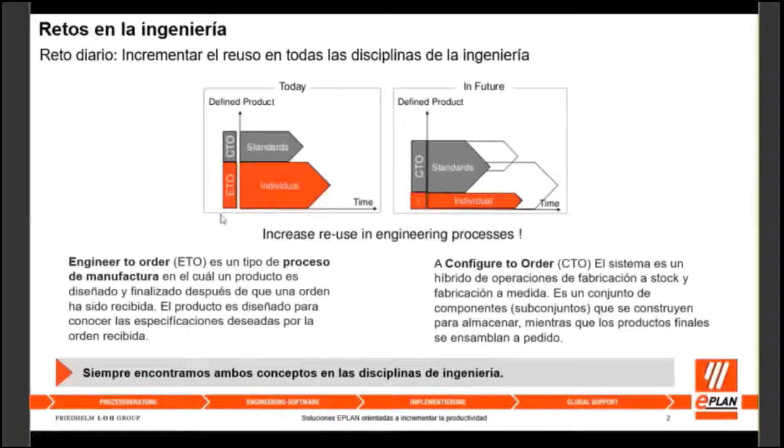Una vez teniendo esta información, identificando cuáles son los objetivos desde el punto de vista de ingeniería, podemos definir cuál es el flujo de la orden, en la cual básicamente es muy típico desde el punto de vista del tiempo del ciclo de vida de un proyecto. ¿Qué es lo que hacemos como primer paso?

Obviamente el cliente nos hace los requerimientos, en el cual nos generan ciertas órdenes. Ya pueden ser órdenes preconfiguradas o estandarizadas que nosotros tenemos, o algunos requerimientos especiales también. Básicamente recibimos la orden del cliente con todos los requerimientos y con las órdenes de trabajo.

Recibimos la orden dentro de nuestra compañía, la orden la puede manejar un ERP interno o un cierto departamento en específico, el cual toma la información de las órdenes como una cotización. Mucha de la información ya está predefinida, sobre todo de los equipos principales, y podemos tener una prelista de los artículos que ya están definidos desde el requerimiento, también qué módulos vamos a requerir y qué opciones debe tener este proyecto en base a las órdenes, y qué variantes también debemos de generar. Pero realmente esta es información general de cómo va a ser el proyecto, y es una información textual.

Teniendo esta información, el siguiente paso es que el departamento de ingeniería, internamente, ¿qué es lo que hace? Recoge la información de la orden, y tenemos varios departamentos que trabajan en sincronía para poder llegar a la tarea: es la parte mecánica, la parte de fluidos y la parte eléctrica.

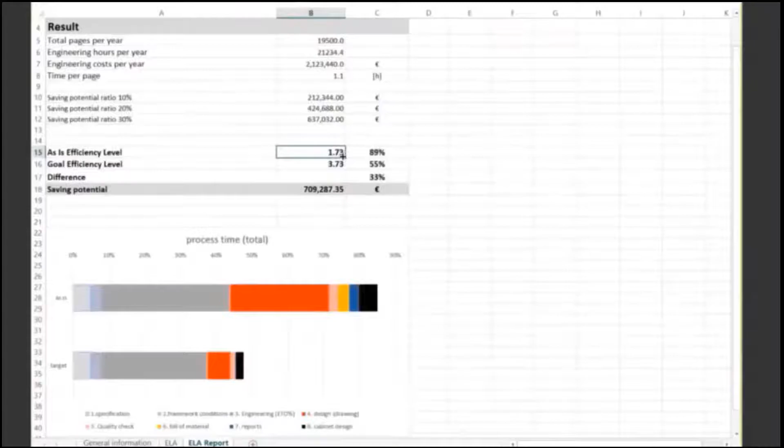Si pasan a un siguiente nivel, en el cual ya usan plantillas, usan algunos artículos, hacen la tecnología de macros, y trabajan de manera más organizada, va a aumentar la eficiencia. Si se conjunta toda la parte del punto intermedio, pero además le meten tecnología de macros y algunas interfaces, obviamente el tiempo se va a reducir.

Y hay algunas otras integraciones con ERPs y otras configuraciones. Ese es el nivel o la clasificación que podemos nosotros, como solución de servicios, identificar. Pues se preguntarán, ¿para qué es importante esto?

En base a esta tabla, nosotros podemos proponer cuál es la meta de eficiencia, y además, con cierta información que ustedes nos pueden proveer. Obviamente esta información es confidencial, aquí es un ejemplo, no es un proyecto, no es información de algún cliente, en la cual básicamente nos dicen cuántos usuarios son los que trabajan en la compañía, en el diseño, cuánto es el promedio de hora, cuántos proyectos tienen por el año, la cantidad de hojas, cuánto tiempo invierten en hacer la parte de diseño de ingeniería.

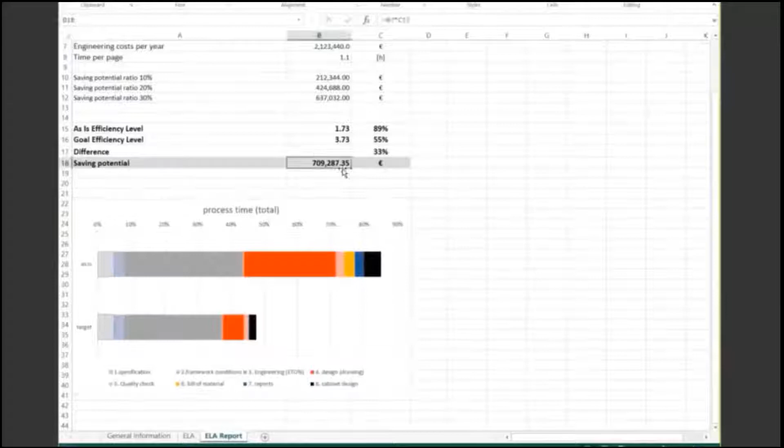Una vez teniendo la parte de ingeniería, ya nos podemos enfocar también a lo que es un assessment de la compañía completa, en la cual ya se ven ciertos factores externos. Una vez teniendo la información bien generada en la parte del ECAD, puedes hacer las integraciones con los software mecánicos, por ejemplo Creo, con algún PDM, también puede ser con algún ERP. Como diseño eléctrico, puedes también tener la comunicación con lo que son PLCs, donde puedan también generar la parte de manufactura de los armarios, tanto internos como externos.

Aquí lo que hacemos es un big picture, una vez que tenemos bien definido o desarrollado nuestro departamento de ingeniería, y detectamos cuáles son los flujos automáticos en los que no tienen ningún problema, pero vamos detectando cuál es el flujo que es manual, dónde son los cuellos de botella y dónde existen la mayor cantidad de errores debido a que no hay una comunicación transparente de estos datos.

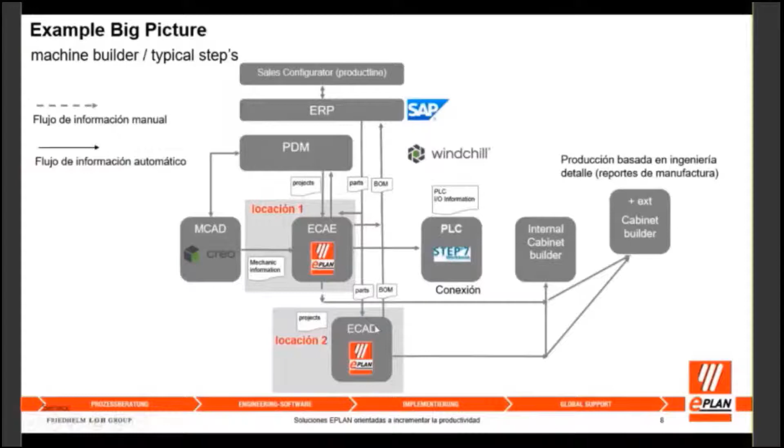Y Carlos, no sé si gustas continuar en esta parte. Sí, gracias Juan. ¿Puedes ceder los derechos, por favor? Sí, claro que sí. Listo. Gracias. Ok, perfecto. Bueno, continuando con lo que mencionaba Juan.

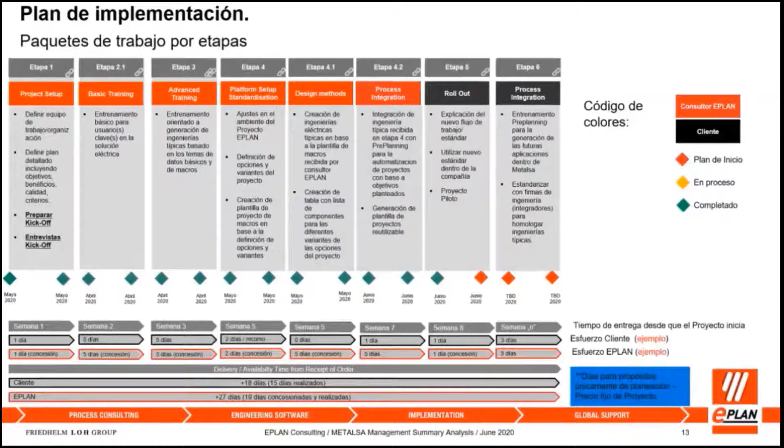Entonces eso básicamente es parte de lo que hacemos. Esta es la organización en cuanto a este proyecto, en este ejemplo de proyecto, y quién participó en este proyecto de estandarización. Ahorita ya se concretó uno más de los que tenemos, y así es como hemos estado haciendo para poder estandarizar nuestros procesos con nuestros clientes finales y también con nuestros integradores. Entonces, básicamente esto es lo que tenemos preparado: un plan de implementación.

Como podrán ver, por sí solo el software tiene mil y un funciones. Lo importante aquí es dedicarle el tiempo para que pueda ser realmente utilizable, reutilizable, que se pueda sacar el mayor provecho. Porque ¿qué pasa cuando nada más se adquiere el software y nada más se adquiere el curso básico y dejamos ahí al cliente que haga su propio estándar? Empieza a lo mejor a meterle mano otro ingeniero y empezamos a mezclar información y se desvía el tema principal del software, que es estandarizar las ingenierías.

Entonces, eso es vital para poder sacarle el mayor jugo al software. La inversión que ustedes hicieron inicialmente es propiamente de la herramienta, pero recomendamos que se tenga un plan adecuado con cada uno de ustedes. Si ustedes están abiertos a que podamos entablar una charla, que nos platiquen su proyecto, que nos platiquen qué es lo que quisieran mejorar, podemos hacer un plan de implementación para que vean a qué nivel puede llegar el ahorro de tiempos y el ahorro de costos.

Incluso estamos considerando ahorros de hasta un 80% en cuanto a tiempos de diseño y tiempos de ensamble, ya en conjunto. Y aparte, el valor agregado que le damos al cliente con la información que ya hay en la nube. De esta manera hacemos más productiva la información.

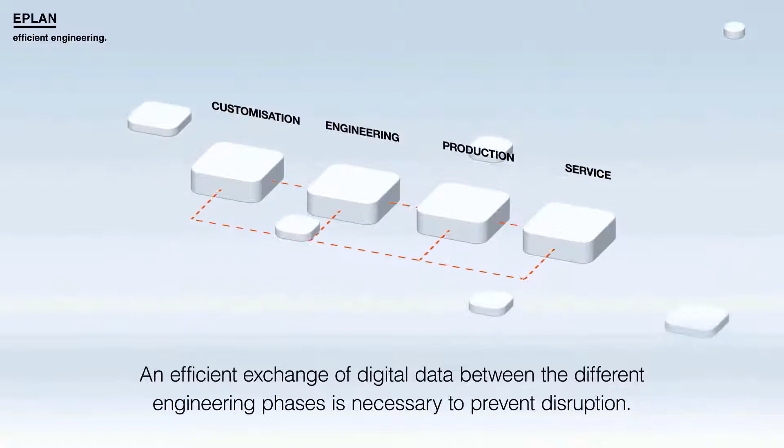If you want to work efficiently, you must think in an integrated way. That starts in the concept phase. Thanks to the digitization and modularization of engineering data, you can immediately start with conceptual design. This smart customization ensures substantial time savings, better estimable offers, and sharper delivery times.

Smart engineering stands for a smart connection of electrical, mechanical, and software data. Thanks to one virtual prototype, everyone speaks the same language. It opens the door to smart production. The digital twin with 3D info and other smart data ensures smooth communication between man and machine.

The better and more accessible information is built up in the concept, engineering and production phases, the less time you'll lose later on in case of downtime. You can also store everything in the cloud, so everyone has direct access to the right digital data at any given time. It's crystal clear.

Working in an integrated way creates added value, shortens the lead time of your projects, and reduces downtime in case of a breakdown. This way you create great added value for your product. Do you want to know how you can do this? The different solutions within the Eplan platform support you towards an integrated engineering and production process. Your digital transformation with Eplan.

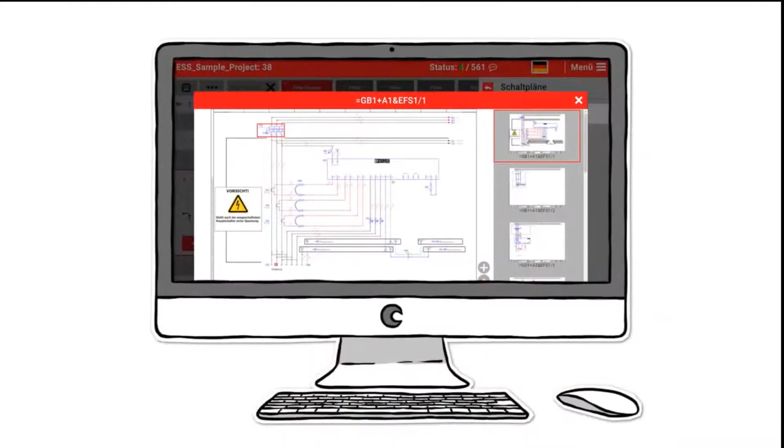From the connections to the best routing path, Eplan Smart Wiring creates a virtual layout that provides shop floors with all the necessary information in a 3D digital format. Data can be passed along to different departments seamlessly. Whether it's a mobile or fixed installation, wiring information is available to the design department via email.

What else can smart wiring do? With the help of a smart device, you can access Eplan Smart Wiring and receive detailed step-by-step instructions for easy implementation. Wiring can be completed without schematics or layouts, and connections can be recorded using the traffic light principle. In addition to creating a transparent guideline, smart wiring also helps avoid mistakes in real time.

By running an automatic project comparison, last-minute changes are now possible. Using Eplan Pro Panel, Smart Wiring and eView will give you a 45% time savings in wire preparation and project completion. To learn more about how to save on cost and time through automation, visit us at info.eplanusa.com/wiring 4.0.

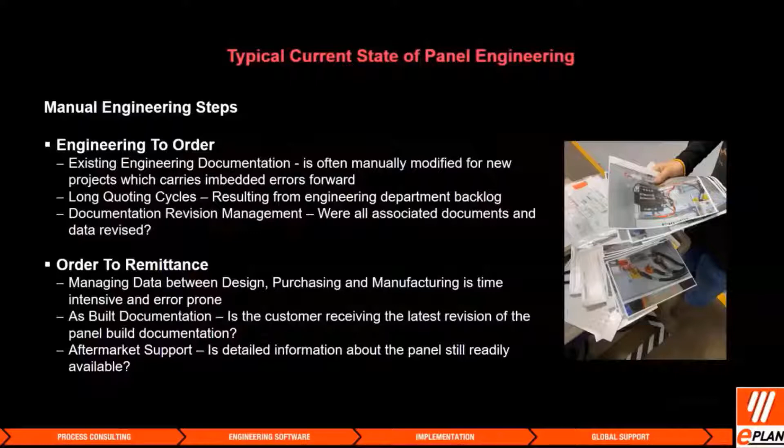A couple of years down the line, perhaps the customer is calling for replacement components or assistance with a unit that's down. That aftermarket support is incredibly important. So we are looking at that as the kind of challenges our customers face today.

Then out on the production floor, just a couple of examples of where we see the biggest buckets in terms of time consumption, where the panel build is really taking a lot of time. One being the enclosure and back panel modification.

This involves the layout of all the components on the back panel or enclosure, marking out all the hole locations and hardware requirements, center punching. This is once all the components have been taken back off the panel: center punching, drilling, tapping all of those holes, and then the cutouts in the enclosure body itself, often for filters, fans, HMIs, that type of thing. Those areas need to be marked and taped off before they're machined.

Wire processing is certainly the largest bucket out there typically. We see somewhere between 50-60% of the time a panel spends on the floor in wire processing. So schematic reading and marking - this is often how people are working through and wiring the panel. It's a slower process.

Hand cutting the wire off of spools, stripping wire, crimping, labeling, and then finally landing that conductor in the control panel. So all of these tasks are currently very manual in most panel shops throughout the country.

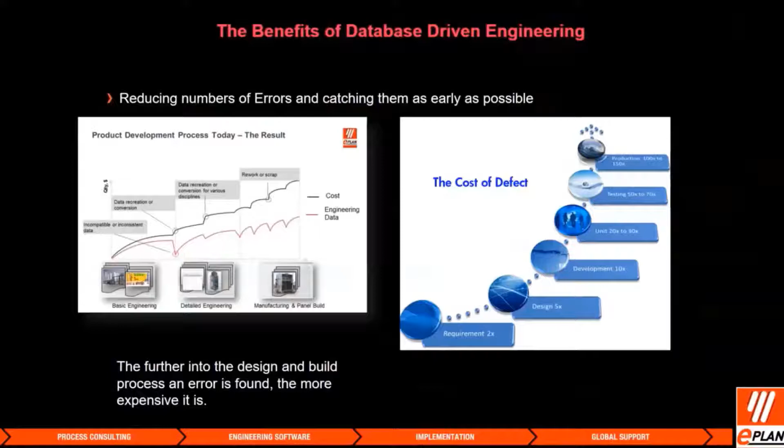Just a quick note here. I think everybody recognizes this, but it's worth mentioning: the cost of errors. The earlier on we catch errors, preferably in the engineering department, the better, because they're less expensive at that point. The further down the manufacturing process the panel goes, the more expensive that gets. You get into testing, which can be very detrimental. But certainly think about a panel being out at a customer site with a problem—that increases the cost several times over.

So the technology we're really going to be concentrating on today is the piece of equipment we see here, showing how the Eplan platform can drive data directly out to these machines. This has the advantages of eliminating human input errors, since changes are being done in one system only. So it's not difficult to keep track of revisions and engineering change orders out on the floor.

So data for automation of processing enclosures, back panels, wire ducts, DIN rails, wire conductors, and terminal block assemblies—even right down to the printed labels for device IDs and things like that.

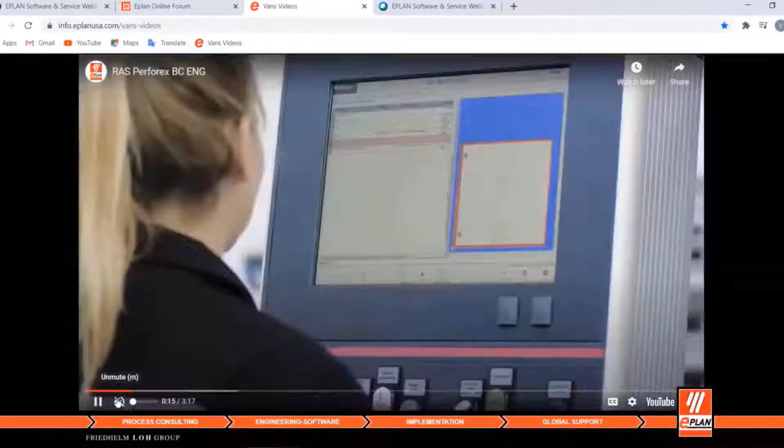The Perforex is vertically constructed, so we were actually putting workpieces on vertically instead of horizontally, like you see with a lot of CNC machines out in the world. All of the clamping and standoffs for the workpiece are specifically designed to not scratch and mar the surface, whether it's painted steel, carbon, stainless steel, etc.

So, very simple operation. What we'll see here is the machine picking up one out of twenty tools on the left-hand side out of the magazine and processing the panel according to the data. We are seeing a drilling process here, and we'll also see a bit of tapping, and then later on some mechanical end milling with this machine.

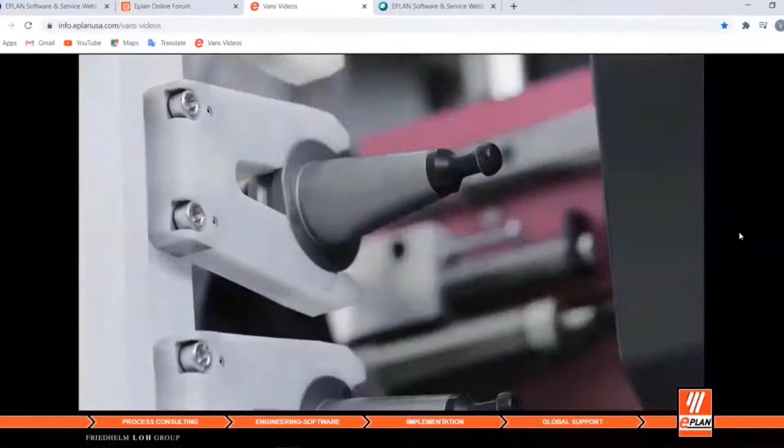We do check all the tools before we put them away, and we incorporate some other technologies with the machine, such as a pressure plate system, which you'll see in a second, which is actually stabilizing the material here with these all-directional red wheels.

And while it's doing the cutout, just a note: what looks to be burrs there are actually just the paint of the enclosure, so they're easily removed.

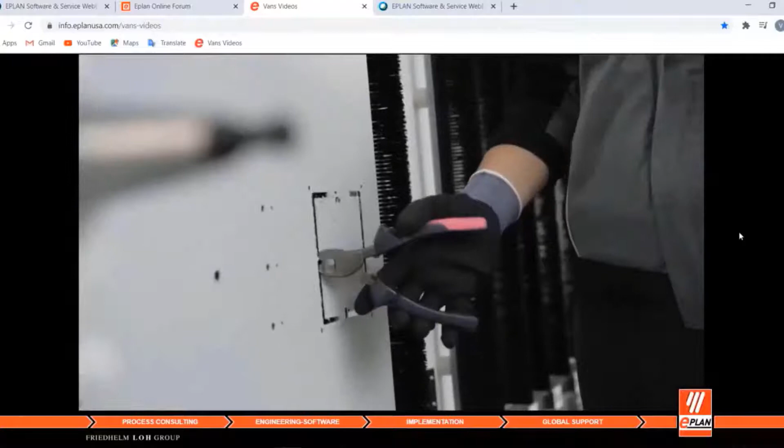She's removing basically a large piece of metal right now. We just wanted to get rid of that by hand and not have it free fall. But the machine will come back and clean up those retention tabs that had kept that piece of metal in place. And as you see here, she's just removing the paint from the cut.

So not only can we work on a flat part across the entire surface of the machine, but as we'll see in a second, we can also load a three-dimensional cubicle, and that's done by opening this door here and just loading, say, a wall mount box, like Ellie will be grabbing in a second.

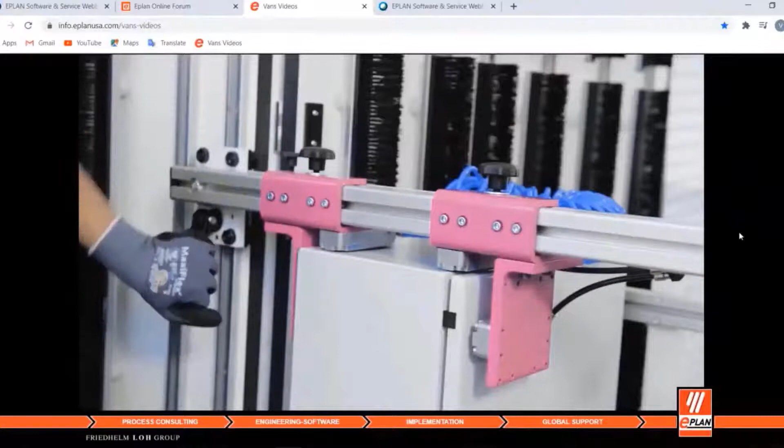The zero points on the machine are hard mechanical zero points, and we see the motorized depth and control bringing the workpiece up to the zero point in the Z-axis. Here, all of the clamping systems are very simple and easy to use. So we use Festo pneumatics to really grab onto that workpiece and hold it stable during the machining process.

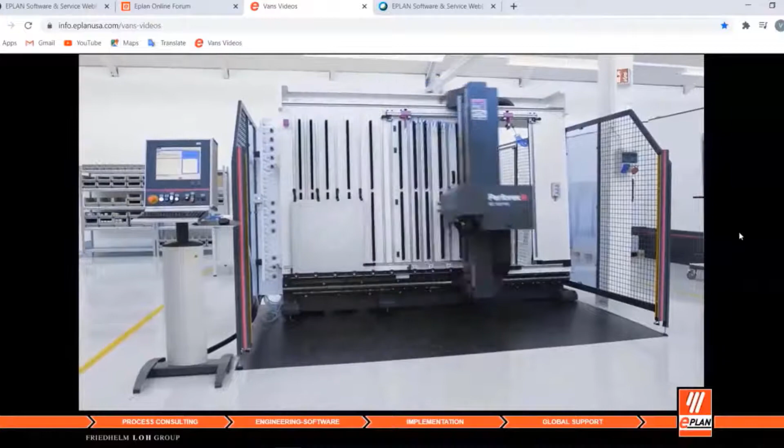So I think that gives you a pretty good overview of what the machine is doing. And of course, that enclosure can be rotated to work on any further sides that are needed. So let's see here, just need to grab the next video then.

And we'll just get a quick look at the laser. So the Perforex laser, at the end of the day, it's performing the same function.

Essentially, the Perforex LC is really designed with the idea of being able to machine stainless steel much faster. Just to give you an idea, it's about a 10-to-1 ratio in terms of speed on the Perforex BC machine, where we're cutting at about 1.2 meters a minute in the XY axes. But on this machine, it's a 1-for-1. Whether we're working in painted carbon steel or in stainless steel, the machine is still cutting at about 1.2 meters a minute.

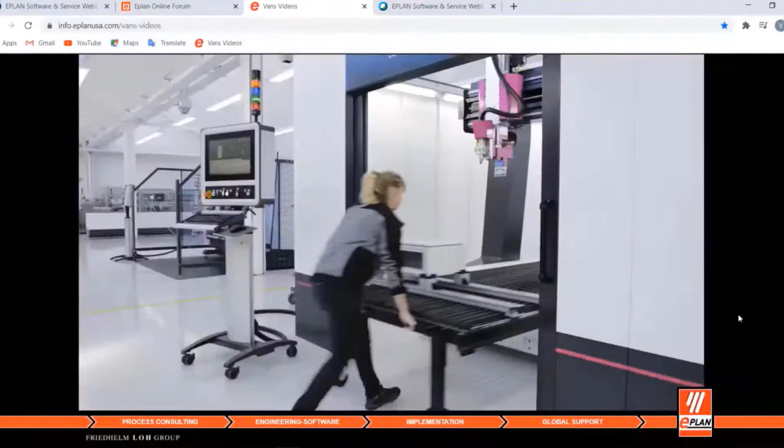It's not the fastest laser in the world, and that's not the point. All of the parameters for this machine are really set exactly to not blacken or bubble up the paint, so we're not creating so much heat like you would with other CO2 or larger fiber laser processes. But still, certainly this is much faster than doing anything by hand, and the cut quality and precision is excellent.

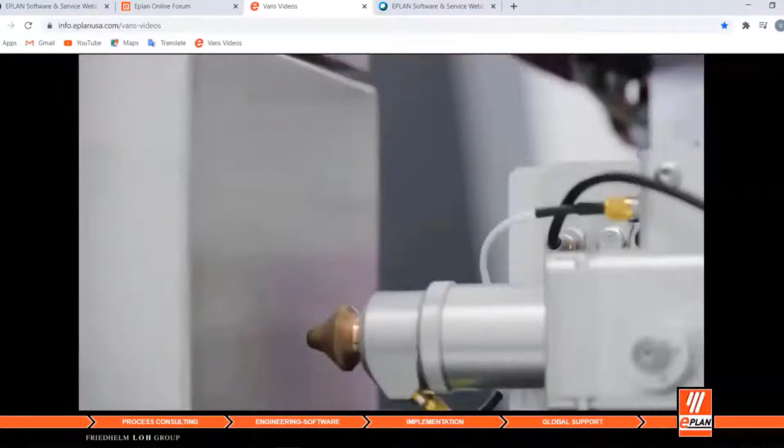So just as a demonstration here, Ellie is going to throw in a stainless steel box, and I'll just kind of fast forward a little bit to that position. So that you can see here, the laser is cutting at the same speed as it was with the carbon steel product. And as you'll see, there's no oxidation, browning of the stainless steel.

Customers are often very particular about the quality of the cuts and making sure that the surface is not marred. This is a very unique laser in that it can pick up, like a spindle, for tapping as well. So we can fully laser drill and then come back and tap out, say, a back panel. So a fully functional Perforex machine, very similar to the last piece we saw.

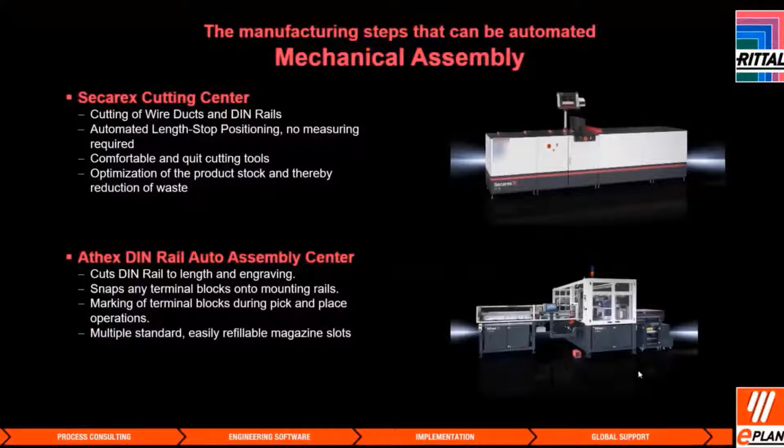So I'll jump back to, actually there was one other video I was going to show you. This is a quick video of the export process out of Eplan ProPanel 3D to the Perforex machine, just showing what this looks like.

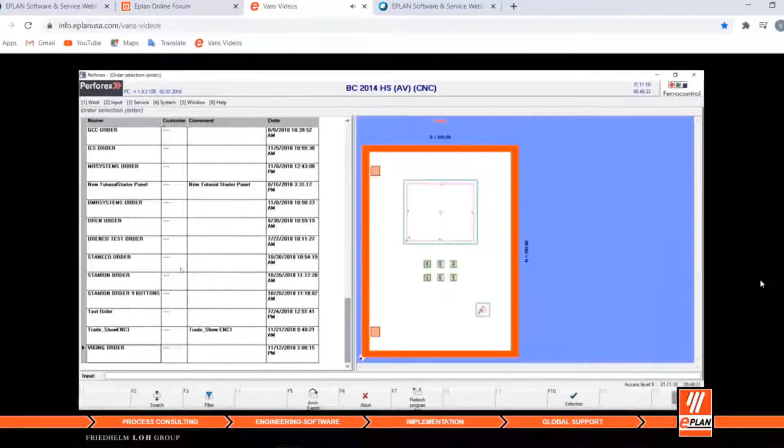We select the piece of equipment we want to export to, say okay, and it shows we've got a lot of cutouts and drilled holes to make in this cabinet. This is the interface software for the Perforex machine, and it was exported directly to the database and imported automatically. We go down, find our trade show order, and open that up.

We can see the programming for each side of that enclosure, whether it's the filters, fans on the side, the connectors, the door, the mounting panel, etc., even right down to the gland plate. When we go back and look at the panel in 3D, we can see all of those features on the enclosure itself and where the mounting was taking place on the mounting panel.

And I believe at this point I flipped it around, and we'll just turn on the drilling view so you can see that it exactly resembles the drilling pattern that was sent to the machine itself.

So then, just wanted to move on to a very quick video about the Secarex machine as well. This is the machine for DIN rail and wire cutting optimization.

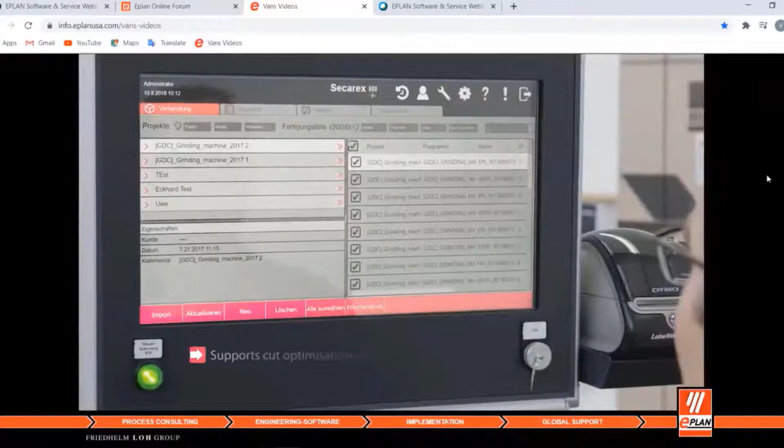Like I said before, all the information we need to make these cuts and kit them together was provided to us through Eplan and through the Perforex software database. So this machine is connected to the Perforex, or can be, and here we're trying to automate as much as possible the cutting of these materials.

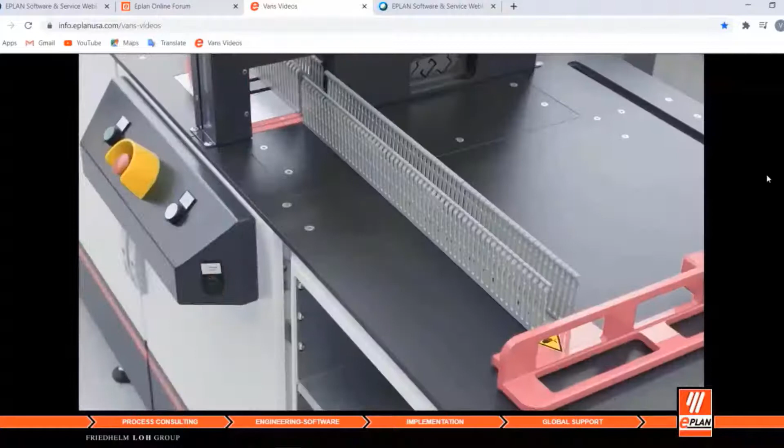You can see the backstop moves away so that it's easily removable, and those are safety buttons. That is an open blade there, so we have safety buttons.

We also produce a label which talks about the job name, the length of the material, and also the XY position on the mounting panel, so the person doing the assembly does that as quickly as possible. The same unit can cut the DIN rail to length. We have 5 different profiles for different types of DIN rail here: 7.5, 15, and C channel, etc.

While we have that large surface on the top, we decided to use the rest of the area underneath the machine to store tools, documentation, and also stock of DIN rail track covers and DIN rail wire track and covers.

So go ahead and get back to the presentation here.

Now this is really the heart of the discussion that I wanted to talk about, and this is wire processing. The one unique thing about designing in 3D is the fact that we now have the opportunity to determine internal wire length, internal conductors inside the control panel. Once we have wire length, we are able to take advantage of that information to drive the automation of wire production ahead of time. And so we do have a couple of different routes here.

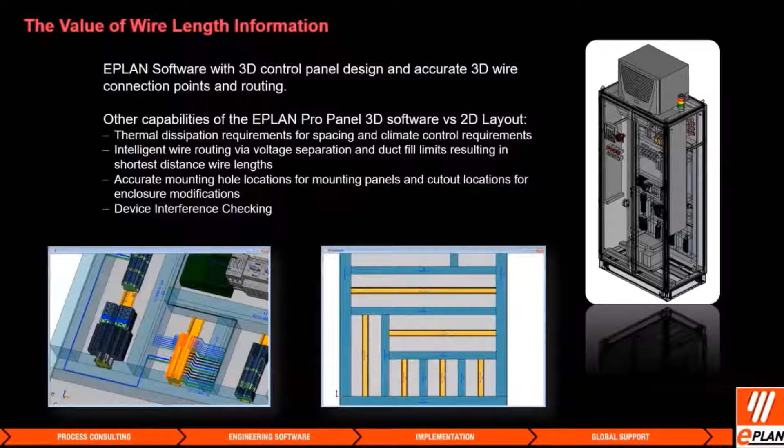Just to move on here a little bit, let's talk about what it actually means to be able to know what the wire length is. When we were talking at the beginning about the manual process, these are all the steps we talked about: reading off of a schematic, stripping, crimping, marking, wire routing, and then doing all of those processes on the other end of the wire.

We've done a lot of time studies, and I've certainly done some myself. If a wireman is able to land a wire every 3 minutes, that person is really moving quickly. We're using a pretty conservative number here, but often customers will state it's closer to an average of 5 minutes. Utilizing some of our semi-automated equipment, we can start to reduce that time significantly, bringing it down to 85 seconds or even 65 seconds. But if we really go to a fully, truly automated solution like the wire terminal machine, we're bringing that time down to 45 seconds. That means landing a wire every 45 seconds at the wire station.

Let's just take a look at what we do with that wire. As you'll see in the video, the wire is actually produced exactly in the sequence that Eplan told us to produce it in. And that matches up 1-for-1 with Eplan's solution for shop floor wiring, which is the smart wiring interface. This is a tablet or touchscreen based application which very clearly defines to the person doing the wiring how the panel needs to be wired, and wired correctly.

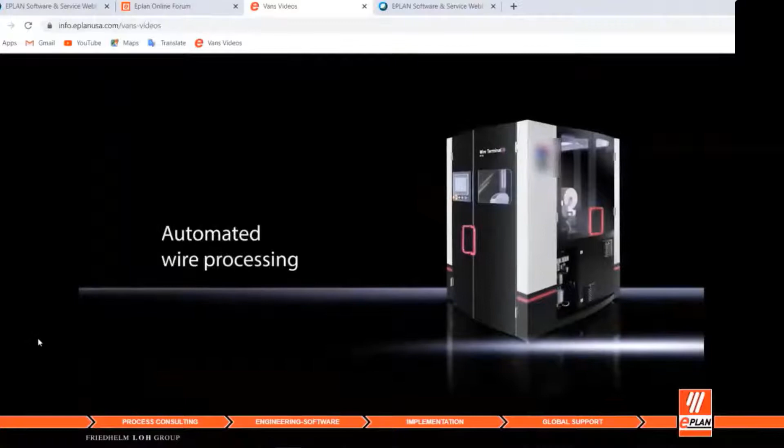So, just in general, we really tried to make this machine as small in terms of footprint as possible. We know that panel shops don't have a lot of floor space out there. Typically, when they're busy, they have none. So we really wanted to try and keep the machine as vertical and small footprint as possible.

But here we see the data coming out of Eplan that can be sent directly to the machine. And in the back of the machine, you can see there's some wires leading to it. So we can have up to 36 different wire types being fed to the machine.

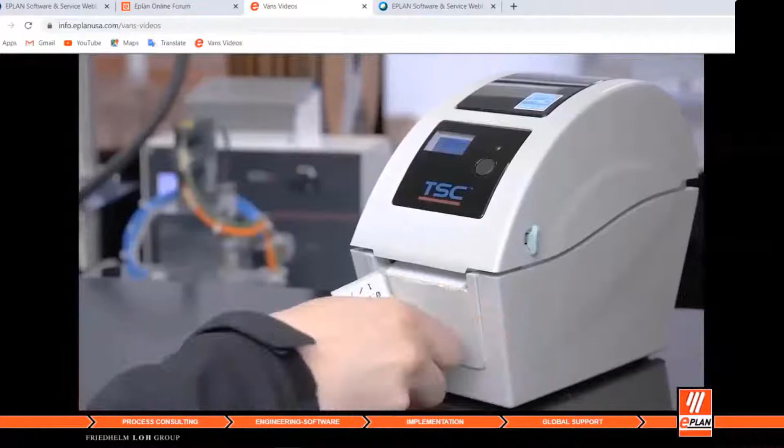So he's just going to be calling up the order for this particular job at this point, and he's just throwing some labels onto our wire rails where the wires are actually organized in sequence, and then you're able to take those out to the wire stations.

Yeah, in any case, he'll get the machine fired up here in a second. The idea of, like I said, being that we're keeping the wires in a sequence that will then match up on the backside with an interface program like smart wiring.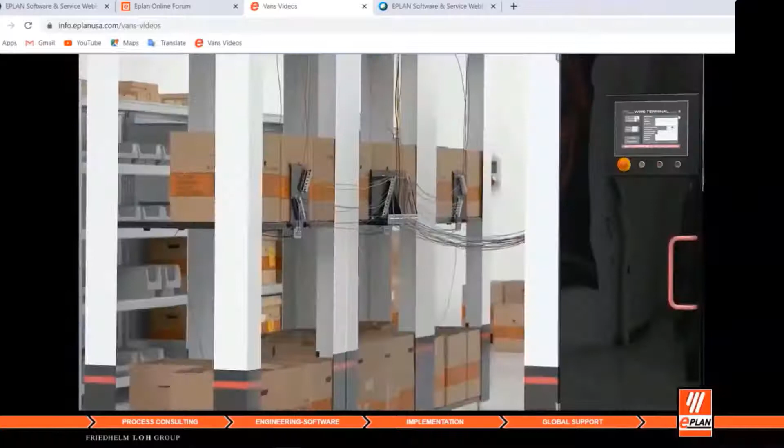So we are ferruling all of the wires, or at least one end of the wire, to hold them in those wire rails that we saw earlier. So we're working with essentially anywhere from 20 to 12 gauge in this process.

And as the wire is fed in through that area, the comb up front, we are inkjet printing the wire. So that means the to and from target source information, schematic wire number, etc., directly onto the wire, cutting it to length, and then stripping and crimping the ends automatically.

So it's then handed off and then placed, as you see here, into the wire rails. And that's how we're maintaining that sequencing that is going to be very important later.

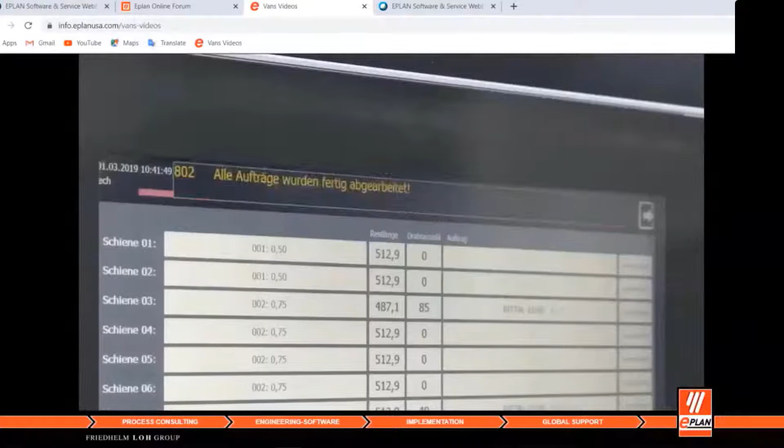So just wanted to give you a brief overview of what kind of automation we're talking about in terms of wire processing. Wire processing has been around for a long time, but having it fit really hand in glove with the engineering and also like a control panel production floor is really the magic here, in that we're making the entire process much more efficient. Using other types of wire processing systems may gain some efficiency, but never to that level.

And just a couple of words about the Rittal enclosure designs, just so it's understood, that if you can imagine looking at the Perforex machine, using very large freestanding 3D welded enclosures can be very cumbersome when loading those onto the machine.

Rittal does have a modular design where each of the sides of the freestanding enclosures are removable. So you're handling, say, a 40-pound piece of metal instead of a 600 or 700-pound piece of metal into the machine. All of the Rittal products are available in full 3D in the Eplan data portal. If you haven't heard about the data portal yet, I encourage you to take a look at that.

So just the design internally of the panels, even panels like wall mount boxes, are really well thought through, and we're maximizing the available space usage inside of an enclosure. The Rittal Therm technology, this is for determining the heat dissipation requirements of a panel, works hand in hand with Eplan Pro Panel to ensure that customers are not undersizing or oversizing the cooling equipment.

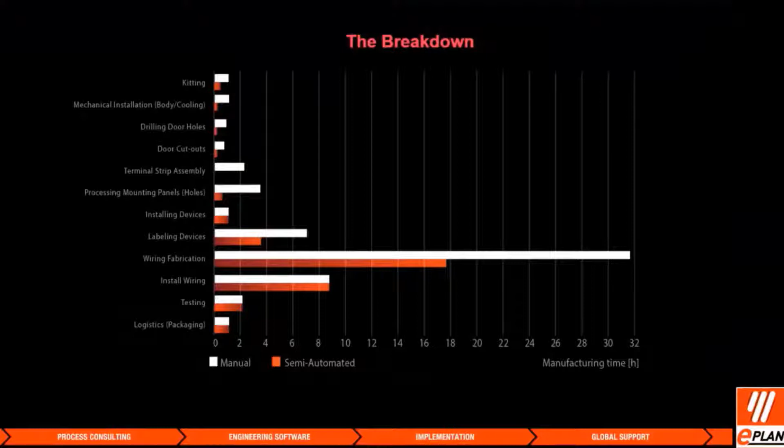We do have customers not only in Europe and Asia, but also right here in the United States that are employing these technologies today. This is happening. We realize every customer can't bite off the entire solution, but we do have entry points where you can start having a very beneficial impact on how your company works today and start down that path.

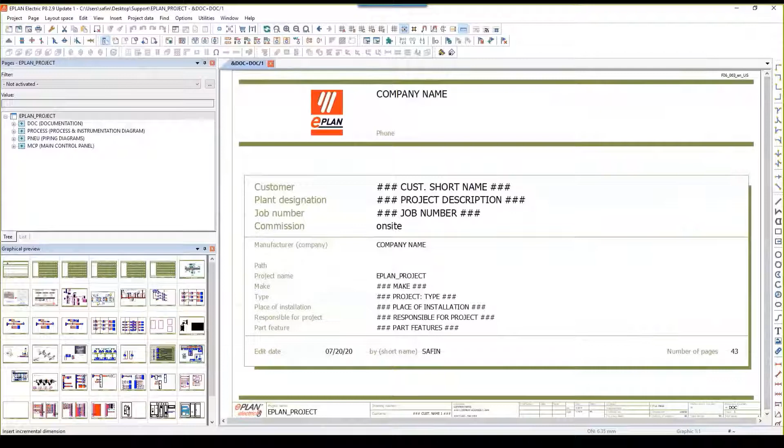This is all based on your preference. Now, Eplan is a database-driven system. You don't have to do any database management.

However, this is just information for you to know that the entire project is set up as a database at its core, and all the documents inside your project are connected together as one database. Think of it as a PowerPoint slide.

So when I go ahead here and open one of my documents, for example the title page or the cover sheet, I'm not opening an outside file. I'm just opening this page inside my project, and I can easily navigate between my pages.

Yeah, that saves me time and results in fewer errors and mistakes. So for example, here I have my title page.

Another benefit of having the project as one database is one source of entry. So I can put the information in one spot, and that information will distribute it on the entire project. So if we take a look at this example, I'm going to change the company name here.

Call this Eplan. You can see that the changes took effect here on the top right away.

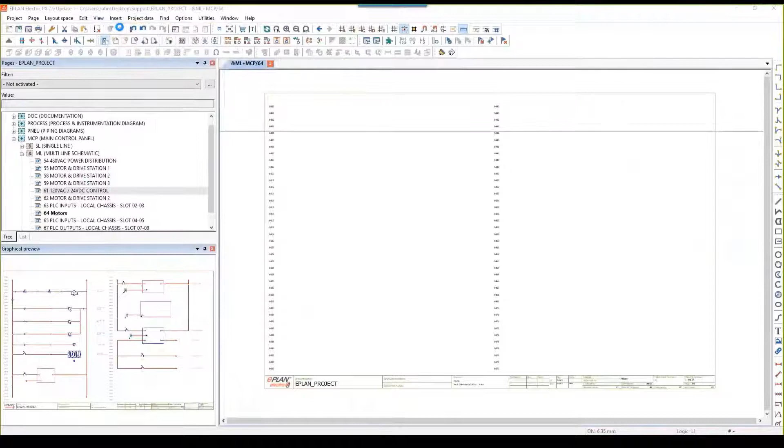You can see all these symbol libraries that Eplan provides you with. These symbol libraries, you don't have to customize, you don't have to maintain. They come with Eplan, and they get updated with every version installed.

So with every new version, there could be some new symbols. Eplan will keep maintaining this to make it as easy as possible for the engineers to start their design. You can see it serves several standards.

So here I can see the NFPA symbols in inches. I can see NFPA symbols in millimeters. I can see the IEC standard, which is the European standard symbol, graphic symbol libraries, and special symbol library.

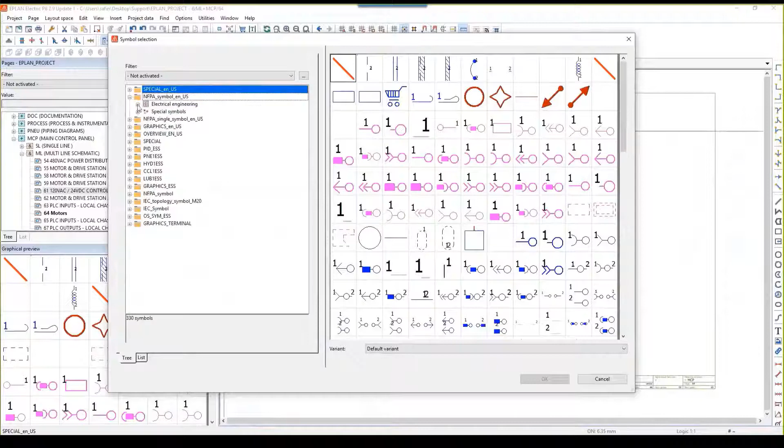So let's say I want to design a motor circuit. I'm going to go ahead and go to my power consumer. And as you can see, it's very well organized.

I will not get lost in menus or search bars. All I need to do is think about the symbol that I need to place, and I can easily target it. You can see here's the motor circuit, more motor sections, and you can see it's even filtered based on the connection points that's in that motor.

So if I go deeper into this tree, I can see, for example, this motor, and I can see the description of this motor.

So let's say I decided to select this motor, while this motor is attached to my cursor, I can click the tab key and rotate between all 8 variants that this motor has.

Once I'm satisfied with this motor position, I could just go ahead and click. Automatically, Eplan will recognize where this motor is placed and give it a unique device tag.

This is based on your company settings. So if your settings are different than the NFPA standard, Eplan will adopt these settings and insert them into your symbol data. So here, the settings that I have for this project are based on the row number and the identification of this symbol, which is MTR to represent a motor.

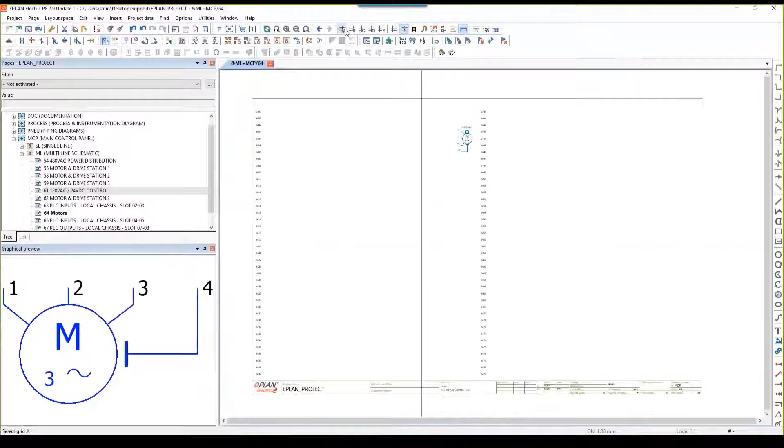Just let me select my settings here. Okay, perfect. So now I have my motor placed on my schematics.

I can double click on this motor later on to find out which part I'm going to assign to it. I can easily go to my part tab and use the device selection tab, which filters the entire database to give me only motor parts.

So if I go into my device selection, you can see Eplan gives me 3 motor parts. These are not the only parts in my part database, these are just the only motor parts in it. Usually engineers are very good at memorizing the part number because they use the same part again and again.

So I'm going to select this motor, for example. Once I select this motor and press apply, all the parts data associated with this part gets attached to this symbol - all the voltage and manufacturer data associated with this part gets applied into this symbol.

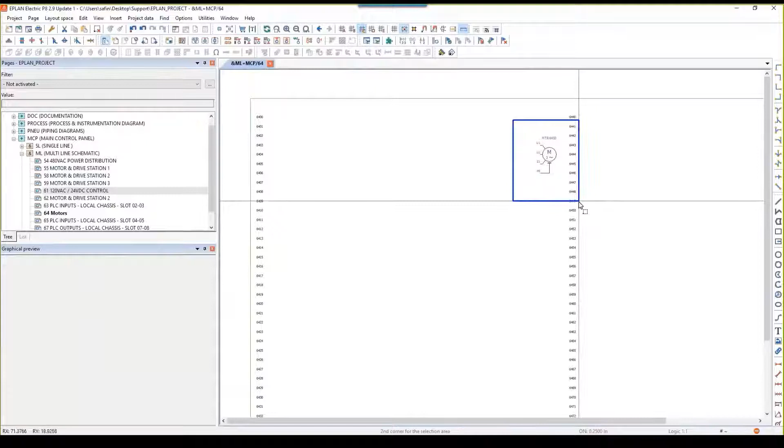Now this is the first method of designing with Eplan, the most simple method, which is designing by the device. Let's say I know exactly what part I'm going to insert on my schematic - in this case, I can easily open my part database.

I'm going to use my filter - I created a small filter here just for this demo. Let's say I know the exact part I'm going to use for this design. I can easily drag and drop the part onto my schematics, and you can see Eplan automatically picks the correct symbol for it.

I don't have to go into my symbol library and search for that symbol. I can just go ahead and drag and drop the part, and the symbol comes with it.

As soon as I hover across from that motor, you can see the connection generating or getting activated automatically. Once I'm satisfied with the position across from that motor, I can just place it. And you can see even if I move it around, these lines or connections get updated automatically.

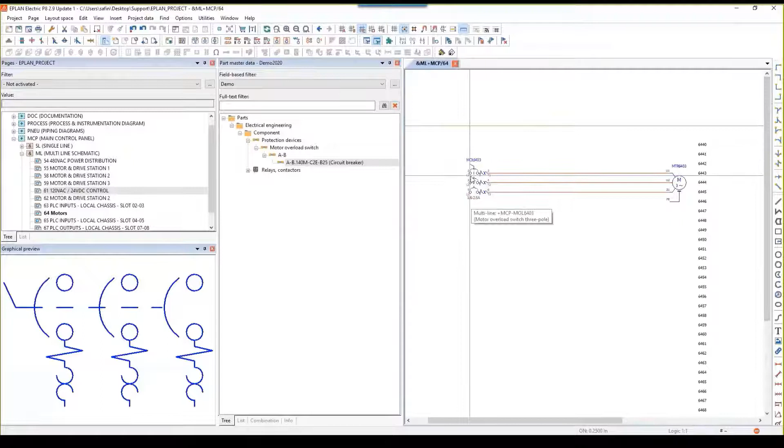The most important thing is to keep them on the same level if you want to maintain a straight line. If you want to change the direction, let's say this is a little bit below, you can use these T nodes or angles to reroute the connection to make it connect to this motor overload.

So back to my point - here we designed by the device because I knew the part number that I'm going to place. And as you can see right here, all the parts data comes automatically. The part number is stored right here, and you can see a picture of that device - all information comes from the manufacturer itself.

So I'm 100% sure this information is correct. And when I generate my bill of material, I know this device will be in my bill of material with the correct information.

Now before I move to the third way of designing with Eplan, I want you to take a look for a second right here. When I hover over the connection, you can see that Eplan gives me the source and the target for each connection. And if I take you a step back, we assigned a part number here and here.

So what I'm doing at this moment - this is the question. Yes, I'm designing, however Eplan in the background is doing tons of things for me. One of these things is building my connection report with a source and a target, even the pin that it's attached to.

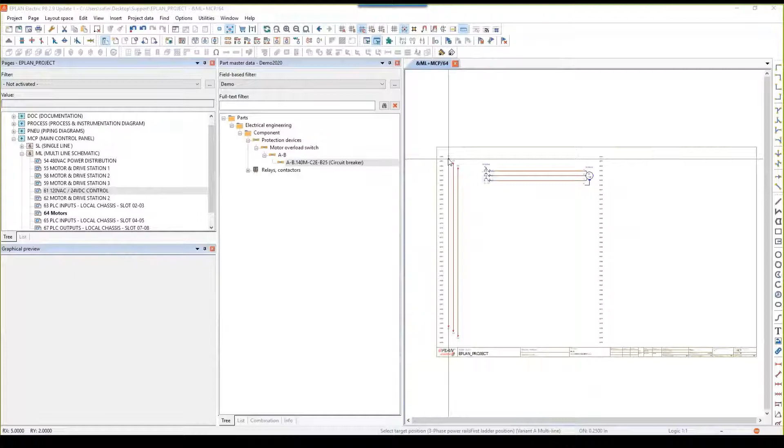So here I'm going to go ahead and place a 3-phase power rail. I can store several variations in the same macro. If I click the tab key, you can see I'm rotating between the two variants that this macro has, so I'm going to go ahead and select this variant.

Once I click XY, Eplan knows exactly where to enter this macro. Once I press OK to complete my action, you can see here automatically Eplan generates this green text.

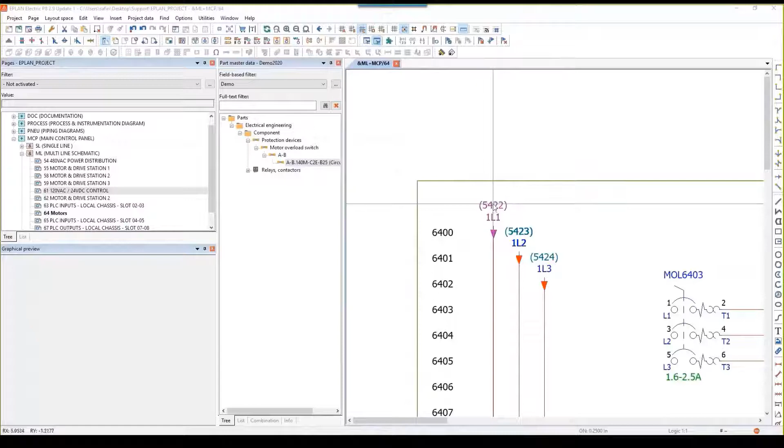So what is this green text? It's telling me that this power is coming from somewhere. When I hold the control key and click on it, you can see that it took me to this page that tells me the power rail I just inserted is a continuation of this connection.

Same here, when I click, I will go back to the page we are creating together at the moment. I'm showing you these things just to see the benefits of having the entire project database connected together. Now, once I'm satisfied with the power rail, I can easily connect it.

I can easily connect it to the power rail just by dragging some T nodes. You can see it's easily placed, easily designed, not so much effort to manage a connection here.

I'm going to continue building on this circuit by inserting more of this. Oops, sorry, wrong button, right here. So I'm going to go ahead and do a power drop, and just like before, I'm going to use my X and Y.

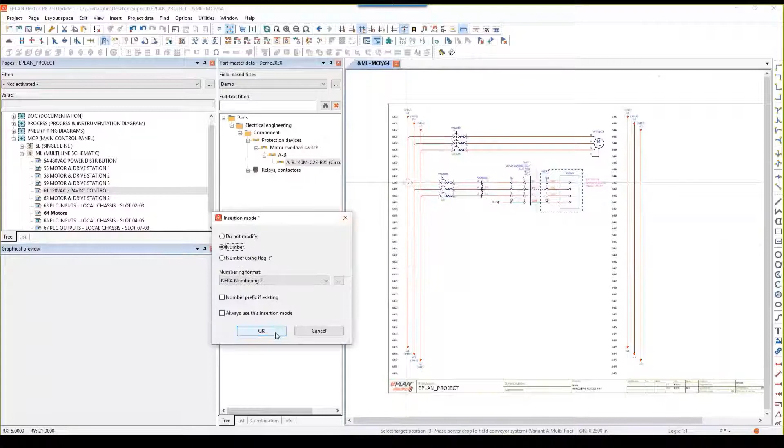I'm going to ask Eplan to number my devices based on the position that it's placed in. So you can see now that this device is numbered based on the position, so this is placed on 6410, and you can see the 6410 got adopted here. I can go back and put a motor with a fan, just like so.

And the devices are numbered automatically. I'm going to put a transformer right below it. You can see all these devices get numbered automatically except for these contacts.

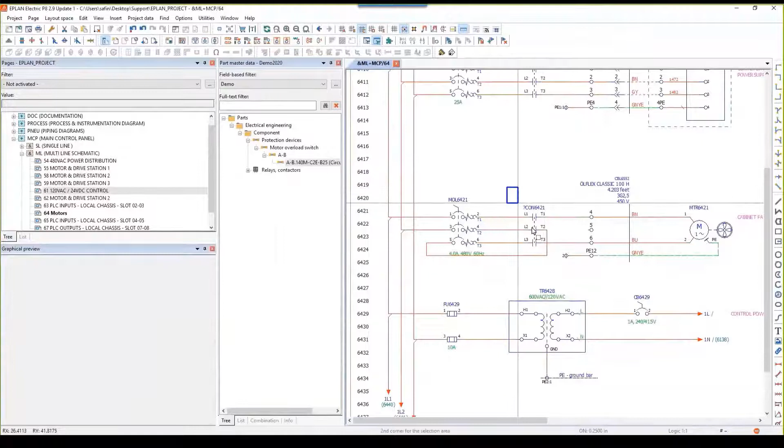The reason these contacts aren't numbered yet is because they are not the main device. So it's waiting on the coil, the host of these contacts, so it can get associated with it and adopt the device tag of the main device.

A quick example of that will be if I open another page here, for example. You can see here's my PLC page. I'm going to go ahead and place this coil just with the same method that we did before.

I can just easily drag some connection from here, place them right here. You can see that this coil is now placed on my schematics. I can go ahead and easily find my device navigator, which is telling me where this device is located. You can see that the coil right here has several contacts that belong to it.

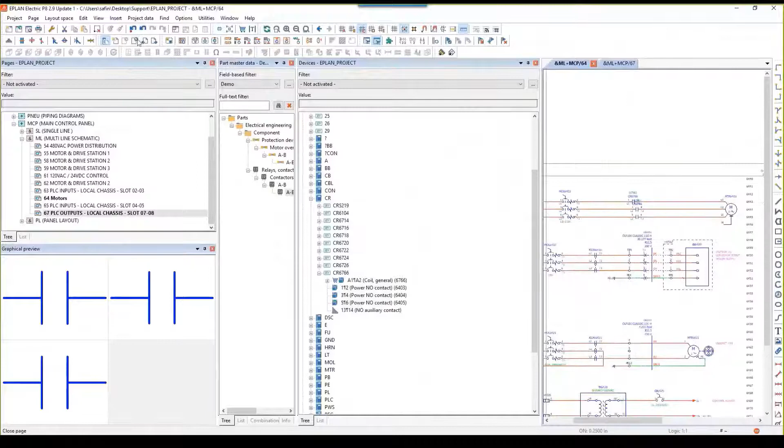These are available for me because I just placed my coil and they are available to be used. All I have to do is drag and drop these just like so. I want to do them in a straight line, just like so.

Let me make the screen bigger. You can see that these get a cross-reference too, so it's telling me where the main devices are located and what part they belong to. And on the other side, of course, if I click right here...

You can see the cross-reference for each contact on its own. So here I could go ahead and click on it. It's located at 6405.

All right, continue building on this screen. I'm going to go ahead and place more of the predefined circuits. However, in this circuit, I want to show the power technology of macros. Here I have a circuit of a motor that carries several variants of the same motor circuit.

With the same circuit, I have up to 16 different variants, and each variant has different categories or values for the entire circuit.

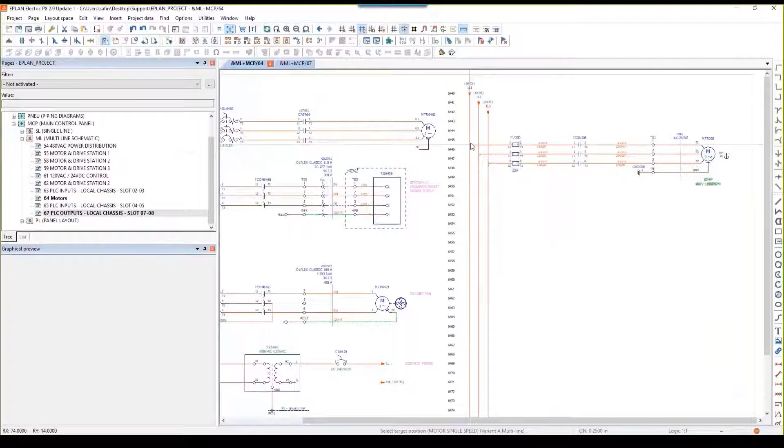So here I'm going to place this circuit, and Eplan automatically asks me what is the horsepower of this motor. For example, I'm going to put 10 horsepower for this one. Yes, number my devices. I can place the second one right here and say 25 horsepower, just to show you the difference between them.

I'm going to place the third one here and put a 75 horsepower. Based on the horsepower of this motor, my entire circuit is getting updates. So if you take a look right here, this is a 10 horsepower motor, and the gauge of the wire is different, and the fuse right here is different as well. So here at 25 horsepower, it's a 50 amp fuse with 8 gauge wire or cable. And here as well, 10 horsepower with a 20 amp fuse.

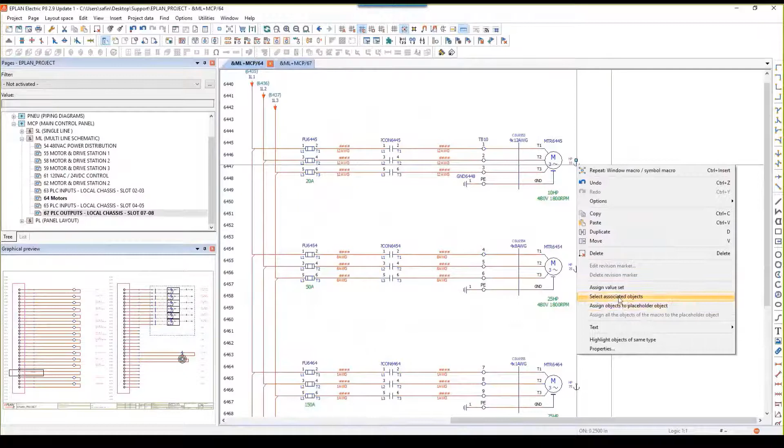Let's say I made a mistake and this is not a 10 horsepower motor. I can easily right click and say assign a value set, just change that to say this is a 15 horsepower, and the entire circuit will get updated. This is the power of macro technology. You can customize your circuit however you want and eliminate tons of work and eliminate mistakes.

All right, I will continue on this. You can see one schematics page took me less than 5 minutes to draw it all. You can see all the connections between my schematics here, and not just the schematics, even the device itself right here, I can see the connections between them. So I'm 100% sure that I'm not missing or adding parts that don't need to be in my project, or forgetting to delete. All this stuff is eliminated.

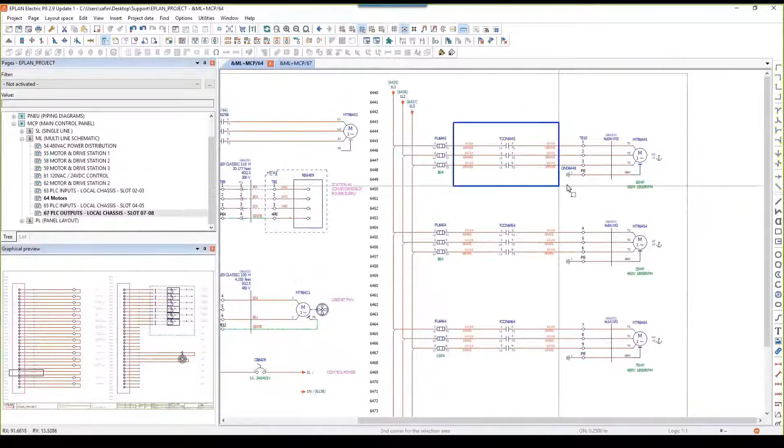Okay, now let's say I placed my circuits. My circuit is perfect. I need to number my wires. I can go ahead easily and select a circuit, or a page, or the entire project, and go to project data, connection numbering, place. Just placing more of these connection definition points. I can select my circuit again and say connection numbering, designate, and you can see now that Eplan is numbering all your connections based on your standard.

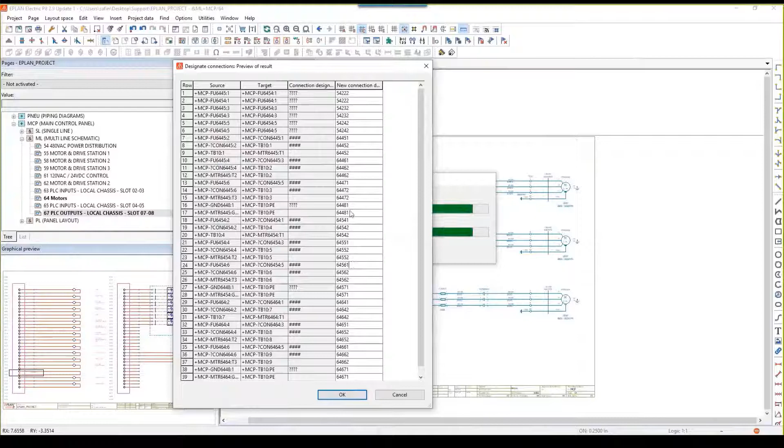Based on your settings, based on your schemes, however you like to number them, Eplan will do it for you. You can see here, this is the value it was before, and now it will adopt the new number that's coming from your settings. You can change that right now if you want, or just leave it the way it is and press OK.

You can see that each wire has its own number.

I've seen a question in the chat. It says, is there a pre-built macro database to pull macros into a project? When you install Eplan, we can provide you with some of the macros, something like this, to look at it and see how it's designed, what is the data behind it, and how it was configured. Every company is different, and Eplan is a very wide platform. We won't be able to make circuits for every individual company.

So the macro is something that you design specifically for your company. You're going to design a circuit anyway, when you design your project or schematics. It will be very easy once you complete your design, once you're 100% sure that this circuit is perfect, and you think you're going to use it again. All you have to do is just select the circuit, just like so.

Right-click and create window macro, symbol macro. Once you do that, you can see here you can specify the variant of this macro, and tell it to be stored in your database. So I'm going to go ahead and call it, for example, XYZ, and I'm going to put it in my, yeah, this is fine, right here. Once I press OK, that's it.

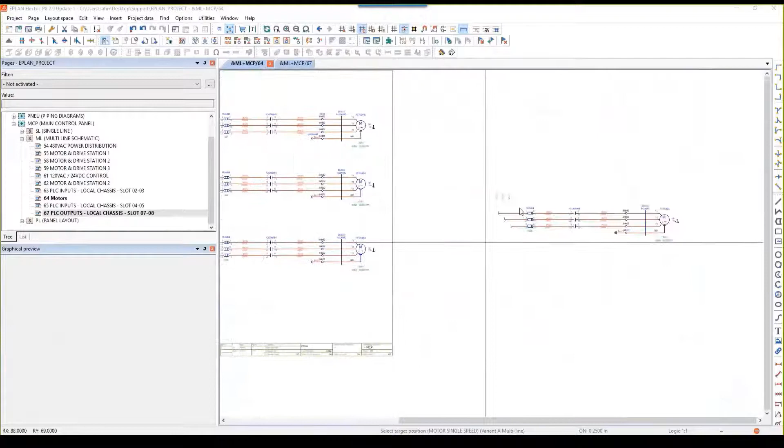My macro is saved. You can see XYZ now is available for me, and here's the circuit, everything that I selected, even the connections, it will select it. You can see that this one is stored. I'm going to put it on the side right here so you can just see it. And of course, all the configuration is stored with it.

It's going to take time to build this macro database, but you design your circuit anyway, so why not make use of it for next time? This is a very easy software to work with. It's not very complicated, and it will work hand in hand with you to be more efficient.

Okay, perfect. Hey, Narelle, there is one other question. It says, please cover terminals. I have a hard time tracking the designation I have already used and often end up using the same terminal multiple times.

Okay, sure, no problem, I will do that. This question, these things are very easy to solve in Eplan.

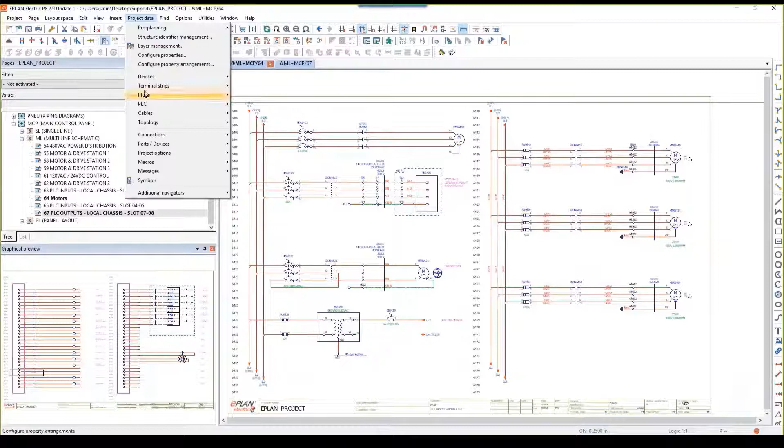So here, if you take a look, I have terminals. The best thing about Eplan is that most of the things we have has its own navigator, so you can easily target it and see how it's acting into your project. You can look at the terminal strip navigator, select any terminals on your schematics, and say synchronize selection. Watch the magic - automatically Eplan opens that terminal strip for you in the navigator, and you can see how this terminal is acting in your project.

For example, if I double click on this terminal which we opened, if the designation is not what you want, you can easily select that terminal and say number terminals, and set up your own designation to achieve the goal you're looking for.

Also, let's give it a shot - I'll open this one just to see. You can see if I open my edit in table window, I can see all my terminals. I can jump my terminals without even showing it on the schematics, or I can show it on my schematics if I want. Now these two terminals are jumped together, and I can keep track of my terminals and where they are connected.

Of course this table is also modifiable, so you can add more information into this table or delete information from it - it's up to you. But here the information available for us at this moment, you can see all the terminals right here with no issues, and you can also see your designation right here and number it.

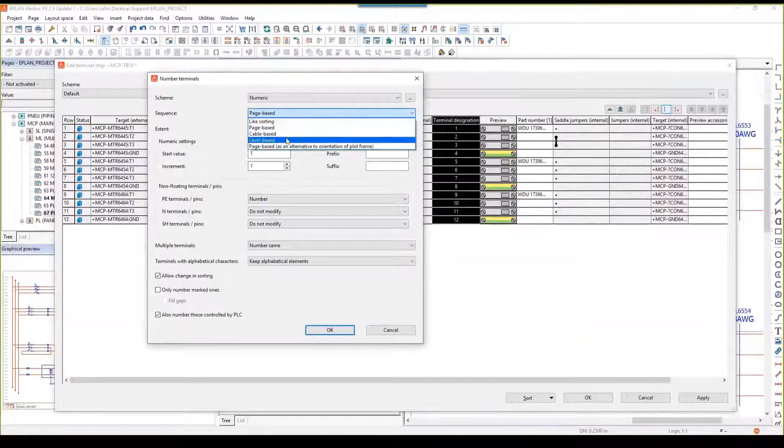You can also say I want to number them page-based, sorting, cable based, all this good stuff - it all depends on your settings. I'm going to cancel, I don't want to save my action. This is how easy you can manage your terminals in Eplan.

And of course, the terminal subject is very, very wide. It will not be covered during this demo session, but Eplan offers many trainings - we have the basic trainings, and a class specifically for terminals where we go over multi-level terminals, terminals with saddle jumpers, all this good stuff. Eplan will back you up with trainings and consulting to be more efficient.

And once you are satisfied with the circuit or the way the terminal looks, just like I mentioned, it's as simple as selecting the circuit, right click, create a window macro, just like we did a minute ago. Okay, alright, let's continue.

Now I'm done with my design - let's say I am completed with my design, and it's time for me to harvest all this good work that I put into my project. If you remember at the beginning when I said Eplan is doing tons of things in the background - yes, you design a circuit, but Eplan in the background is building your connection list, your bill of material, all this good stuff.

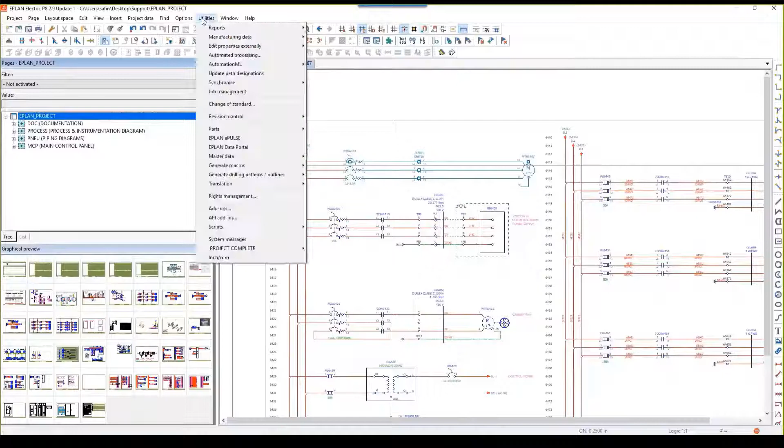So I can go to utilities, report, generate, and here's the list of reports that Eplan can generate. You can see tons of reports available for you - for example, PLC addresses overview, PLC cards overview. This is a very important report that customers ask for because it will help them a lot when they troubleshoot or building their cabinets. Terminals connection diagram, terminal strip overview, or maybe connection list or cable overview, summarized part list which is the bill of material - all this good stuff is available for you.

Now for this specific project, I only picked these specific reports so I don't want to overcrowd my project. I wanted to make it as simple as possible so you can see the result easier. So I'm going to select my project and click the gear, and watch the magic.

Just take a couple of seconds to run through the entire project, and that's it. Once I close this window, you'll probably notice that Eplan added some more sections here. We're going to go one by one through these sections.

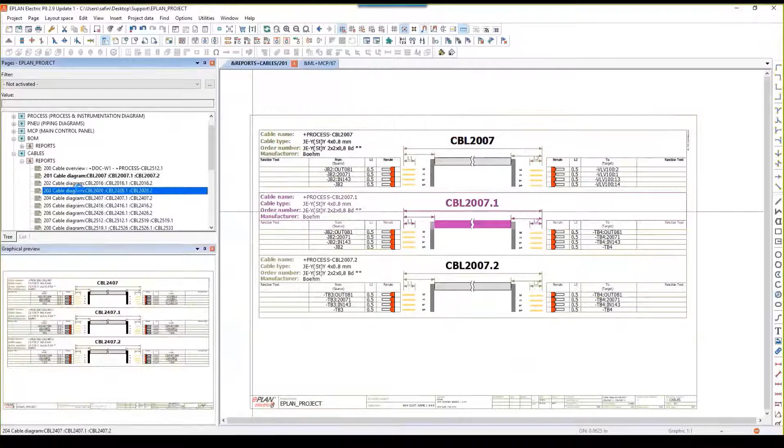Let me pick a good one. They're all good, but I want to make sure we get one that has more information. That of course depends on the part that you assign to the cable. Here you can see the source and the target for each cable, the end attachment to that cable, and the color of that cable.

And here you can see the cable device tag showing for that cable. If I click on this cable, it takes me to where this cable is placed on my schematics, so I can see all my connections.

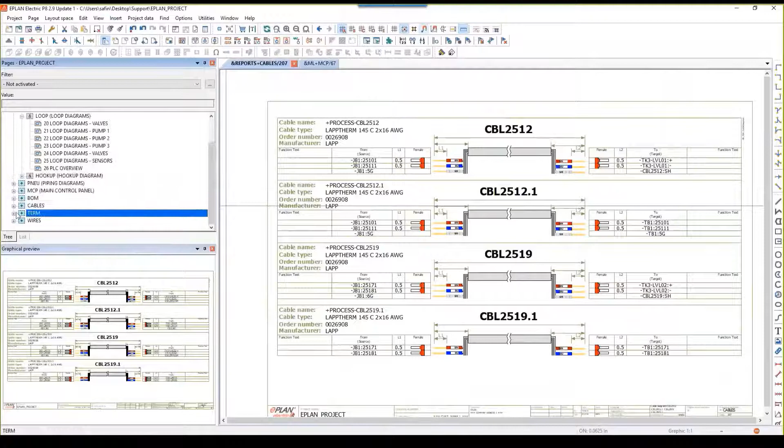Now let's get to the terminal reports. We have two types of reports here: terminal strip overview, where you can see all the terminal strips in your project, and a terminal diagram, where each terminal is shown specifically on its own.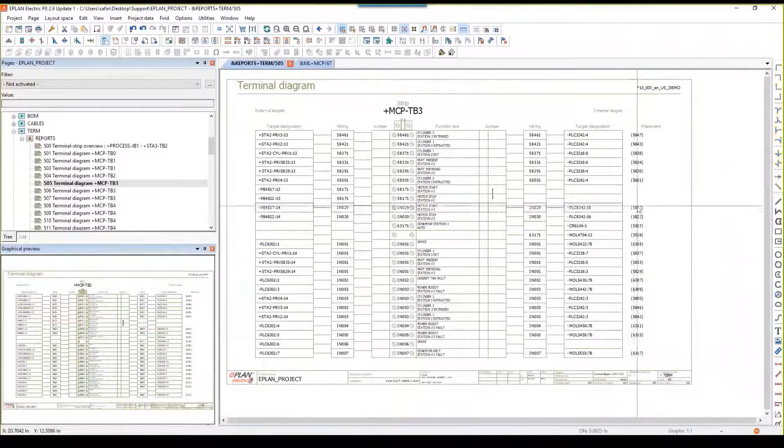You can see also, when it shows, it has more details. For example, like this one, you can see if there's a text or function text surrounding that terminal. You can see the target designation, and if these terminals are jumped together, or if two terminals are jumped together, you can see the jumper on your report. You can also look at where this terminal is placed on your schematics as well, just like we did with the cable.

Now, one of my favorite reports is the wire list. It individually shows you each wire or each connection in your schematics with the source. If I zoom in so you can get a better view, you can see the source and the target for each connection, the length, the color, the number, and the end termination of this connection. So imagine instead of going through a 10,000 page project to build a cabinet, you have this connection list telling you exactly where this wire goes, the gauge of this wire, and its length.

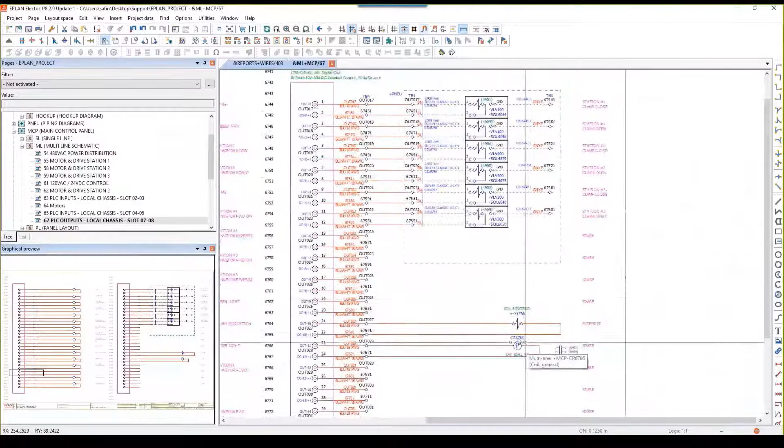You can just go one by one from the source to the target and build your panel easily. One last thing I want to show you before we end the session: when we were looking at the cables, or at the schematics we built together, we saw the connections between the devices. For example, if you remember this coil right here, we saw the connection between this coil and its children, or the contact that belongs to this coil, right?

So this applies to the entire Eplan project. If you take a look at the top left here, we probably didn't go through all of this, but I will go through it with you. You can see all my schematics, my fluid diagrams, my P&ID, all in one project, yeah?

All these P&ID symbols or loops are connected somehow. If there's a sensor or a valve, it's connected somehow to the fluid diagrams or to the electrical drawings.

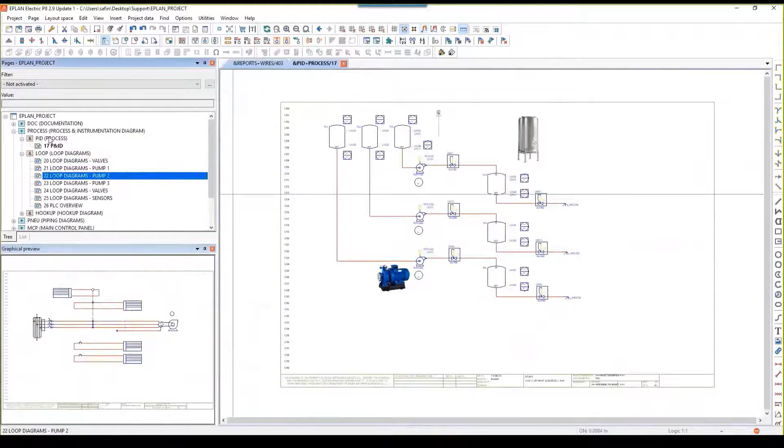Here I can see the system overview page, and I can click and see, for example, this proximity switch that's located here. I can click on that proximity switch and easily see how it's wired in my electrical drawing.

So the entire project data will be stored as one database in one project. You don't have to keep opening files again and again. All of that is stored in one project.

Another thing is your 3D representation is also included in your project. So if I go ahead and open my 3D navigator, you can see my hydraulic flow system, and I can see my main control panel. I can open my main control panel just like so.

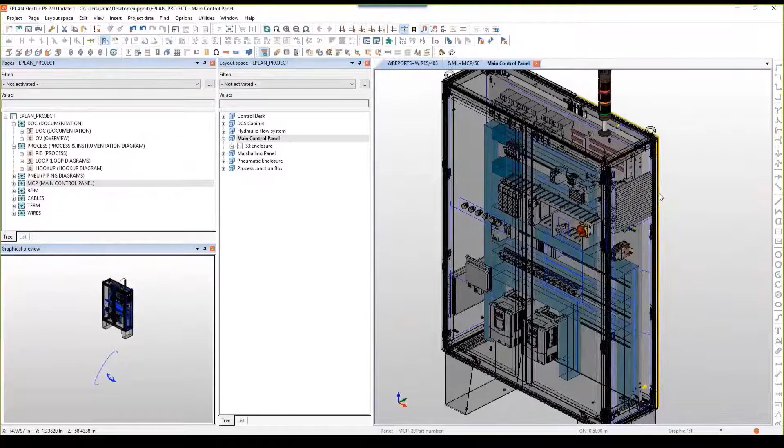Take a look at my control panel, move it around and see what's inside it. And of course, I can show my mounting panel and look at these devices that are in it.

So if I have a device here, I can highlight that device and click the F key on my keyboard, and it will take me to my schematics and tell me where this device is wired.

I can look at my control panel as a whole and see if all my components are fitting in one cabinet or not, or if I need more adjustment, or maybe I need a smaller or bigger control panel.

Yeah, this is all done with ProPanel. In the next session, my colleague will go over ProPanel and its benefits, and he'll show you the connection between ProPanel and P8, and what type of data we can export out of ProPanel.

Also, before I end this session, out of this 3D representation, I can extract my 2D. Here I can see the 2D representation of my control panel, and this is generated automatically. You don't have to put any effort into it.

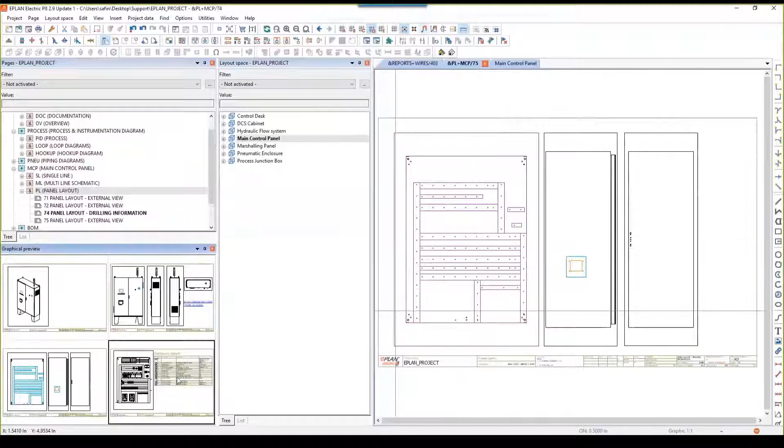You can see here the drilling pattern, and here I can see my control panel with the enclosure legend. You can see the bubbles for each device and the description.

I really don't want to show you how to generate these automatically because I want you to go ahead and join my colleague's session later, and he will show you tons of things that Eplan Pro Panel could do for you.

You can go to Help and then Help Content, and Eplan will open the help file for you. You can type anything in the search field and Eplan will filter that for you. You can see the news of Eplan, an overview of Eplan, and here it's very well divided into sections.

Here's the common functionality of Eplan, here's ProPanel functionality specifically for ProPanel, Fluid, pre-planning, and Eplan View. Not least, I will go over how to export reports out of Eplan.

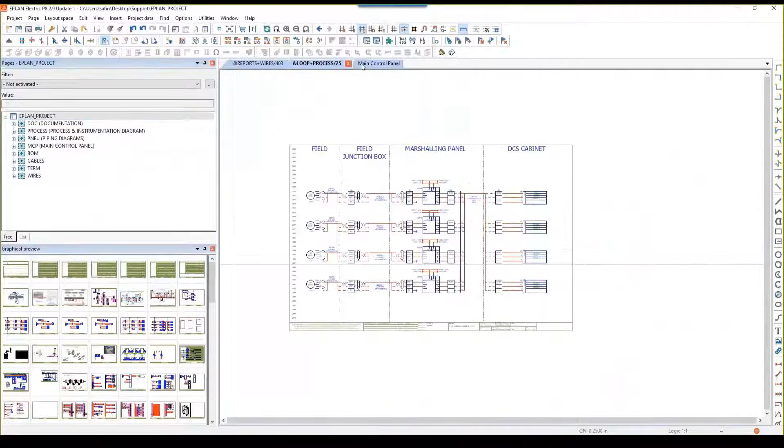Now we saw the generation of Eplan reports inside the project. Now, if I'm interested to see a bill of material as an Excel file, how can I do that? Is it easy with Eplan? Which type of information can I see or view in the Excel file?

I can easily do that by selecting the project, a page, or a section. Go into Utilities, Manufacturing Data, Export Labeling, and here I can see these are settings stored for me. I can say I need a bill of material, or a connection list if there is any, or a cable diagram. It's up to you, whatever you want to export.

But this time it's one at a time. We can't generate the entire report sections at once. So now I'm just going to do the bill of material, and I'm going to say export and start application.

You can see here the name of the project at the top, and the properties: part number, order number, total amount, number of units, manufacturer name, and designation, which is a short description. Sometimes the part number you send to the manufacturer differs from the part number used in Eplan. All this information is stored in your database, filtered to show only what's used in your project.

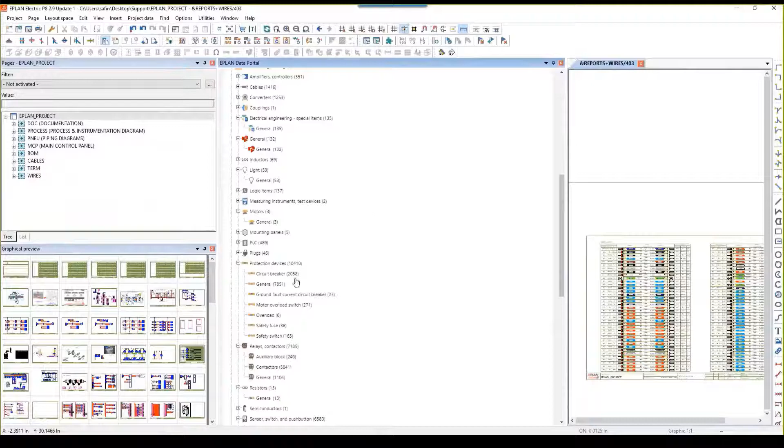Then you scroll down to the product family you're looking for. In this case, the circuit breaker. You click on it, and it gives you all the information available for this particular component.

If you go down to the features, you'll see this manufacturer is offering different data depths: commercial data, 2D information, and a connection point or function template, from what I can see. Then you're able to click this and add it into your parts database if you'd like to use it.

This is directly embedded into our software, which is another unique feature that sets us apart from other types of software out there. Our master data team works directly with manufacturers to gather this information and compile it into complete data sets, so you're able to click and download it directly into your project.

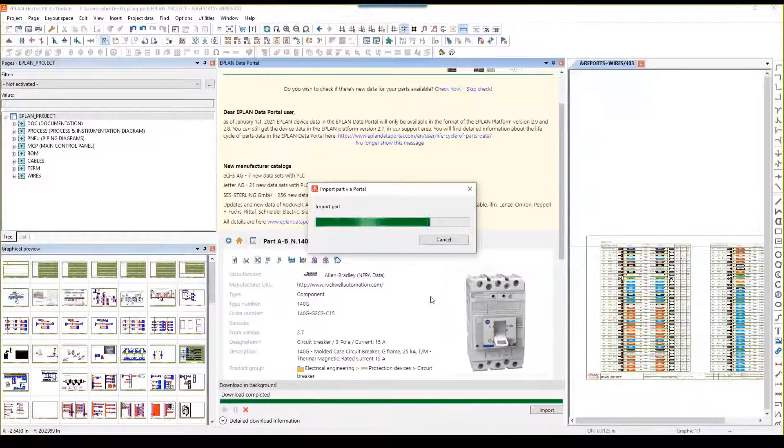And you can import it directly, as Narelle is showing. This is a great benefit because it saves time, not having to go and search. That's really the idea of the data portal, so you can find product and component information without having to search for it.

All you have to do is import it once into your internal library or database, and then you can use it as many times as you want. You don't have to go into the data portal and import the part every time you want to use it. It's more efficient to import it once, and it will live in your internal part library as long as you want, unless you delete it.

This is the benefit of having the data portal. As Jennifer said, all the parts on the data portal are maintained by the manufacturer of those parts. They check these parts, put the data into them, and design the macro and 3D graphic of the part. So you can be 100% sure this information is correct because it comes from the manufacturer.

You can also rate the parts. If you see something abnormal about a part, you can rate it and send your rating to the manufacturer. I'll rate it as excellent or remove my rating, and I can send reports to the manufacturer saying, hey, can you check this? This information isn't available, or maybe it needs to be modified.

Although Eplan may be part of your vision, you need to know for sure that it's going to work, and that you'll be able to show your team. The Eplan guided trial team of experts can help you with this task. This test drive of sorts is not only free, but it includes a real project plan with guidance and support from an Eplan certified consultant. So what are you waiting for? Your journey starts here.

Designing the future means being open. Open to everyone and every idea. We connect engineers, systems, data and disciplines worldwide for machine and panel builders.

Designing the future means empowering. We empower engineers all over the world to realize their ideas. Our tools and solutions enable you to maximize your efficiency, customized to your needs, from simple to high-end.

Designing the future means being future-proof. We lead the market with more than 50,000 customers and with 19 languages. We offer local support in more than 50 countries. This makes us the global partner for you and your future success.

Because efficient engineering is when a plan becomes Eplan. Collaboration means being close to our customers, listening to your needs and your challenges, and understanding how we can help you to plan and shape the future.